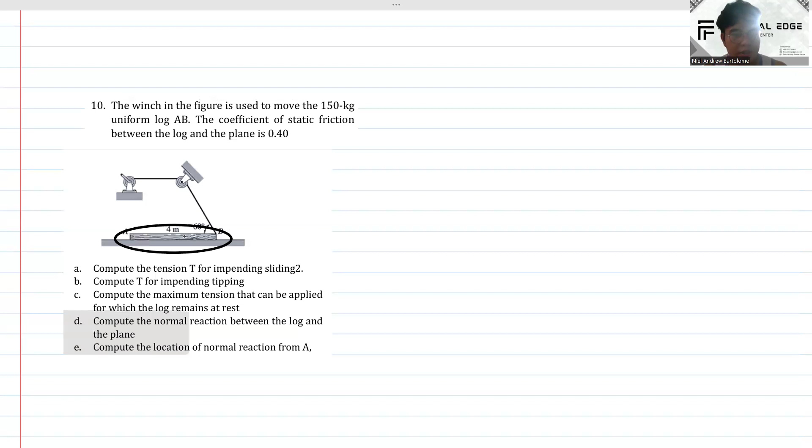So meron tayong wooden log AB, and the coefficient of static friction between the log and the plane is 0.4. Okay, so meron tayong log dito sa baba. So ito yung log natin, then sa baba, yung plane. So naka-rest siya. Then meron tayong winch dito that is used to move the 150 kilogram uniform log.

Okay, so ano yung mga nahanap? Part A, compute the tension T for impending sliding. B, compute T for impending tipping. And C, compute the maximum tension that can be applied for which the log remains at rest. Letter D, compute the normal reaction between the log and the plane, and E, compute the location of normal reaction from A.

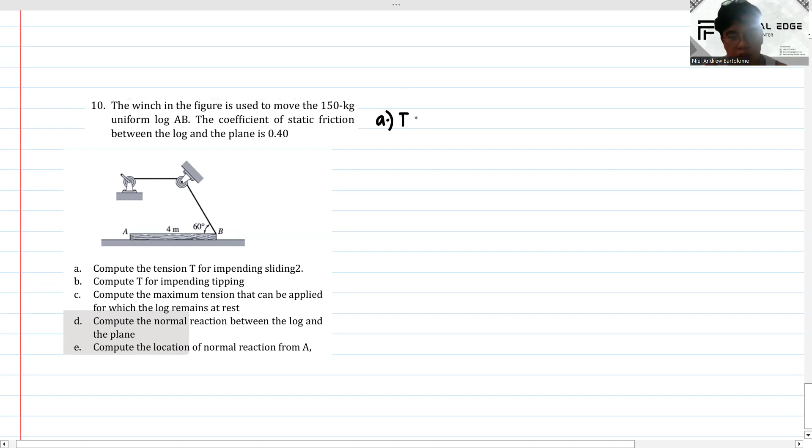So paano natin isosolve? Part A muna tayo, yung T due to sliding. Okay, paano natin yan isosolve? So kung i-check natin, drawing tayo ng ano dito, wooden log. So ito yung log. Yan, so due to sliding, so ito yung magiging direction niya.

So meron tayong tension dito, tawagin nating tension, T. Then ito yung point A, ito yung point B. Then ito yung magiging direction ng motion natin due to sliding. So ito yung magiging motion natin due to sliding. Right? So ano mangyayari dyan?

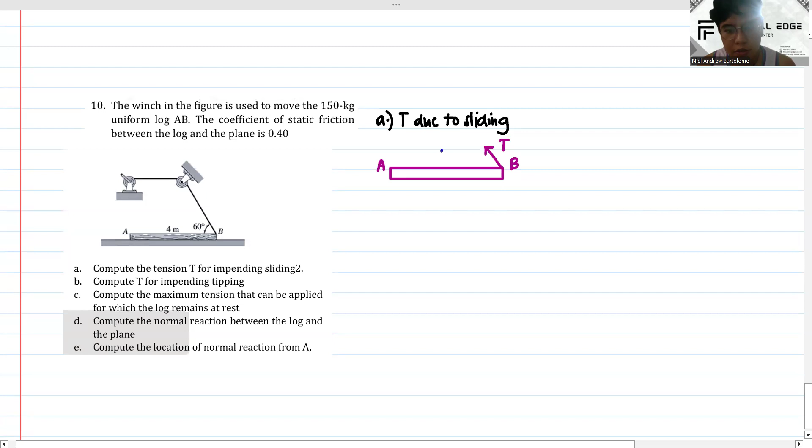So meron tayong self-weight, alisin natin ito. Lagay natin yung mga forces. So we have W that is equal to 150 times 9.81, so we have 1471.5. And ito, we have 60 degree. Okay, then ito, yan ba to? So we have 2 meters, then 2 meters din dito. Okay, ano pa ba?

So ano pa yung mga forces na pwede mag-act? So we have normal force N. Lagay natin dito somewhere here, unknown yung point ng normal force natin, yung application ng normal force, point of application, so di natin alam. Then we have, since pa-left yung direction ng sliding natin, so therefore yung mag-o-oppose yan is yung frictional force F, yung direction niya is opposite. So ito yung force F natin. Ayusin natin. Yan, so ito yung F natin.

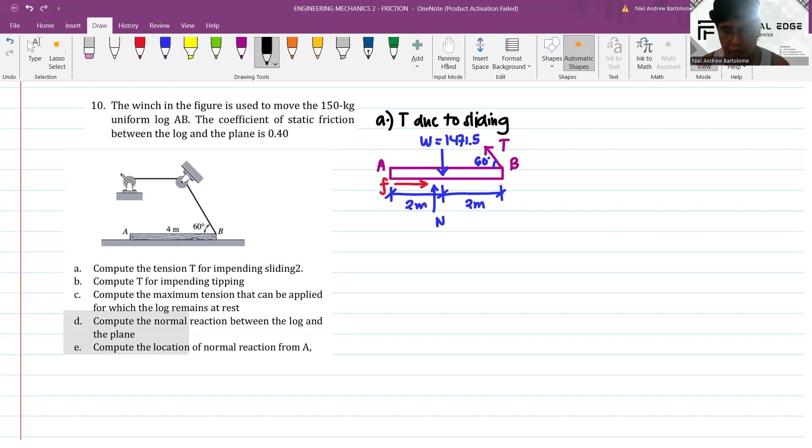So paano natin siya isosolve? So meron tayong T, unknown, which is yung hinanap, W, and F. Okay, so pwede natin masolve. Pwede ba? So paano natin siya masosolve? Una, summation of forces, X is equal to 0.

Okay, so we have yung ano natin, 0.4, no? So we have F that is equal to mu times N, that is equal to 0.4 times N. Then summation of forces, horizontal 0. So we have ito, positive to the right. So we have 0.4N minus T, yung component nitong T horizontal, T cosine 60 is equal to 0. Okay, so yan yung equation 1 natin.

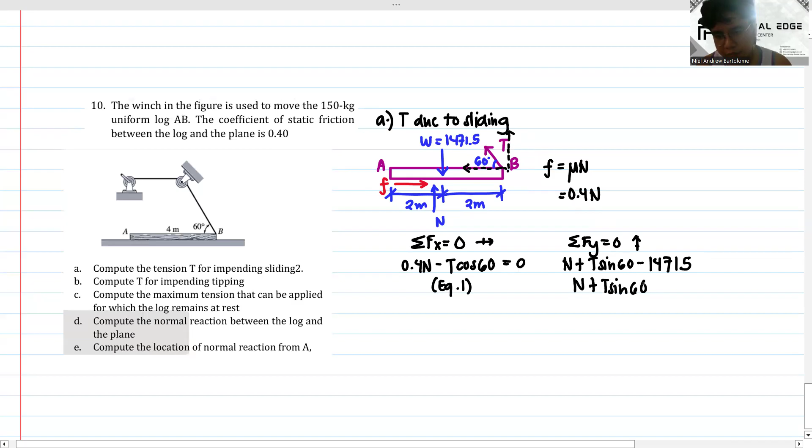The next, summation of forces, vertical is equal to 0, upward positive. So we have N plus T sine 60, yung T sine 60 po, ito yan, okay, yung vertical component nitong T minus yung weight natin. We have 1471.5. So we have N plus T sine 60 is equal to 1471.5. So ito yung equation 2 natin.

So we have two equations, two unknowns. Solve for N, then solve for T. Ilan ba yan? So mode 5, then 1, 0.4, negative cosine 60, then 0. So sa second row, we have 1, sine 60, then 1471.5. So yung N natin sa una, we have 869.26 newtons pa. Okay, then yung tension natin, we have 695.41. And itong T, yun yung answer natin sa part A. Okay, so nakuha na natin yung answer sa part A.

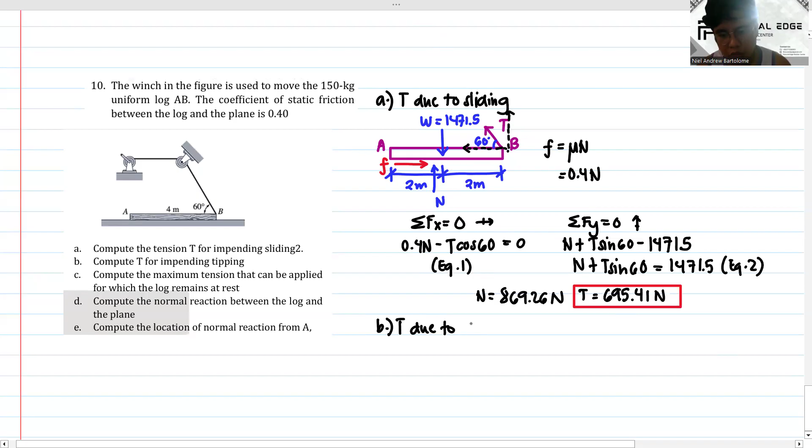Next, part B naman, so due to tipping naman. So anong mangyayari kapag due to tipping natin, T due to tipping. Okay, redraw natin yung figure. Baba natin. Yan, so ano mangyayari kapag tinip natin siya? So analyze natin, ito yung ano, so ito yung wooden log. Kasi natin.

Okay, sa mangyayari yan, kapag nag-tip siya, ano, so initial, ito yung magiging, tawag dito, yung positioning ng log natin. Pero kapag nag-tip siya, so magiging ganito na siya. Okay, so ito na yung magiging log natin. Then meron tayong tension dyan. Okay, then ito yung weight.

Weight natin, okay? So paano natin masosolve kapag due to tipping? Kapag tipping yan, guys, lagi tayong magmo-moment. Saan tayo magmo-moment? Kung titingnan natin, ito yung B, gumalaw to, umangat yan. So therefore magmo-moment tayo sa A. Meron tayong point A and point B.

Meron tayong mga force, yung mga forces. So we have W, tension, then ano pa? Ang mangyayari dyan, since magmo-moment tayo sa A, ang mangyayari kukomputin natin yung T. So ano pa yung mga unknown variables? We have N and F. Para mawala yung F saka N, yung normal force saka frictional force, itatapat natin yan sa point A.

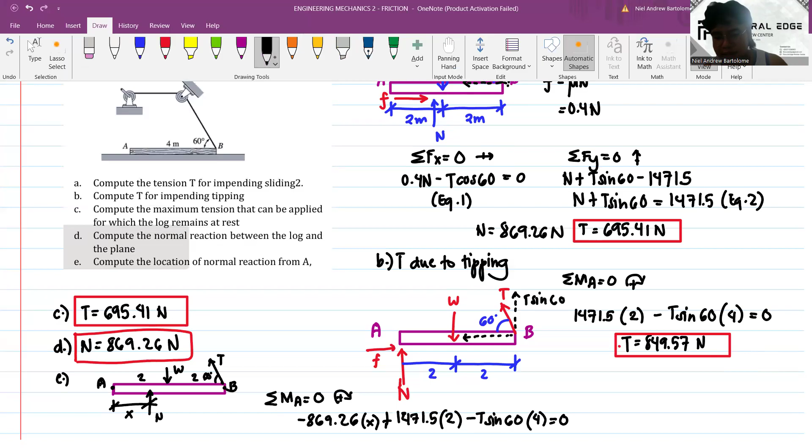Then solve for... solve na natin yung X. X is equal to ilan? So meron na tayong value ng T. So meron na tayong value ng T. Then solve for X na lang.

So we have 1471.5 times 2 minus 695.41 sine 60 times 4, divided by 869.26. So we have 0.614 meters, and yan yung answer natin for part E.

Okay, so ganyan lang naman ito na lang naman yung mga solutions natin sa problem 10. Okay, so next, last item tayo. Problem 11.

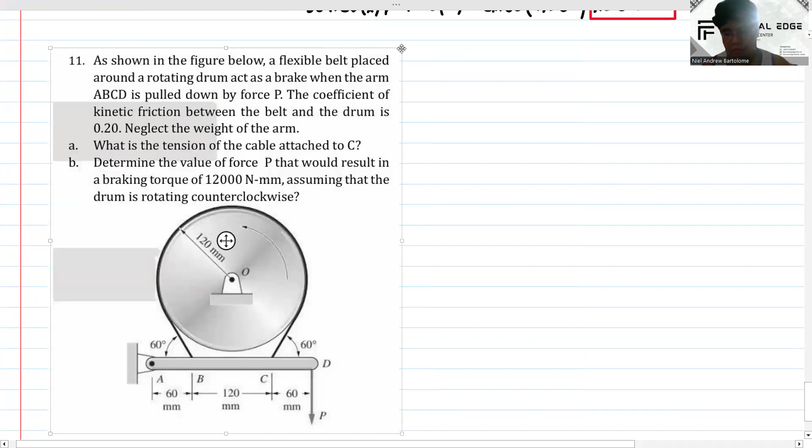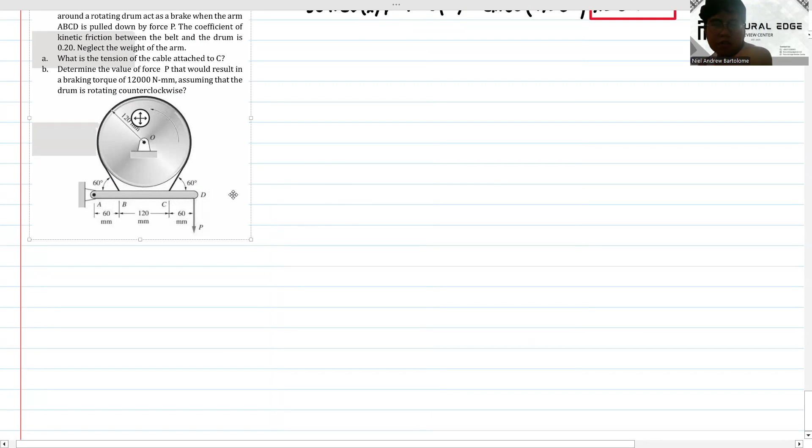Tingnan natin: as shown in the figure below, a flexible belt placed around a rotating drum acts as a brake. So meron tayong rotating drum dito, ano, then yung center niya is O, itong point O. Then act as a brake when the arm ABCD.

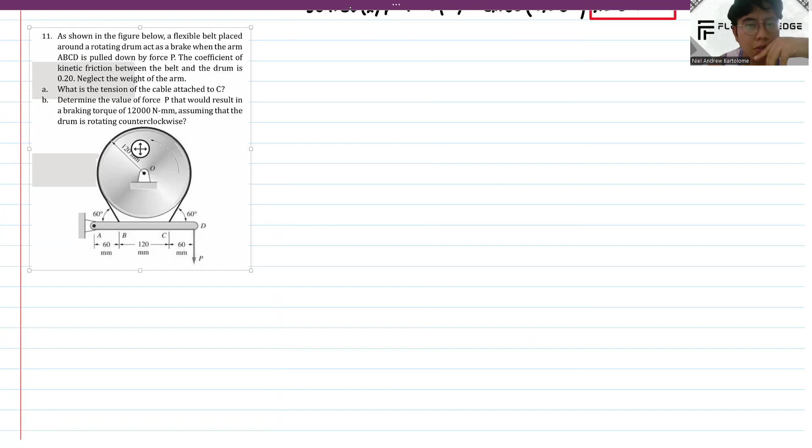So meron tayong arm dito sa baba, then meron dyan nakakabit na belt. Okay, and yung ABCD daw natin is pulled down by force P dito sa isang dulo. Then the coefficient of kinetic friction between the belt and the drum is 0.2. So meron na tayong given: yung mu k natin, that is equal to 0.2. Then neglect the weight of the arm.

Part A: what is the tension of the cable attached to C?

Okay, so ito, paano natin do-draw? So ito ano? So meron tayong tension dyan. Analyzing itong arm ABCD, ito yung tension at B, ito yung tension at C. Okay, yung hinanap is yung tension at C. Then analyzing yung drum, ito yung tension niya.

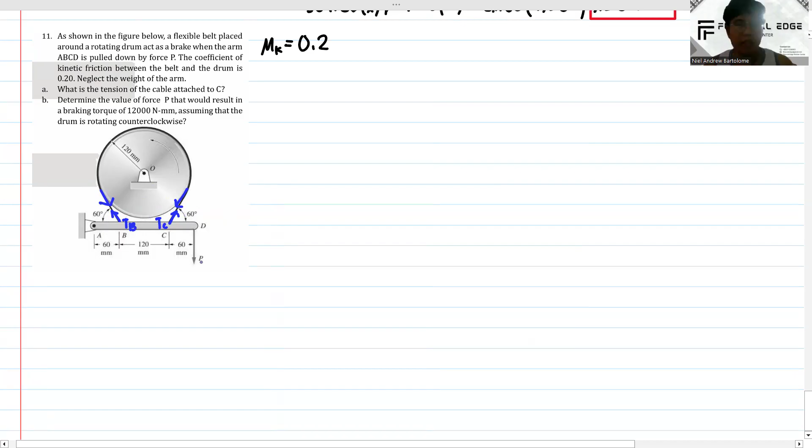Okay, paano natin siya isosolve? Una, analyze natin yung figure. Merong 60 degrees dito, then due to force P, ang tendency dito, bababa itong arm ABCD, so para magiging ganito siya. Okay, bababa yan, so parang ganyan yung magiging deformation or pag-deflect ng tawag dito nitong arm ABCD na to.

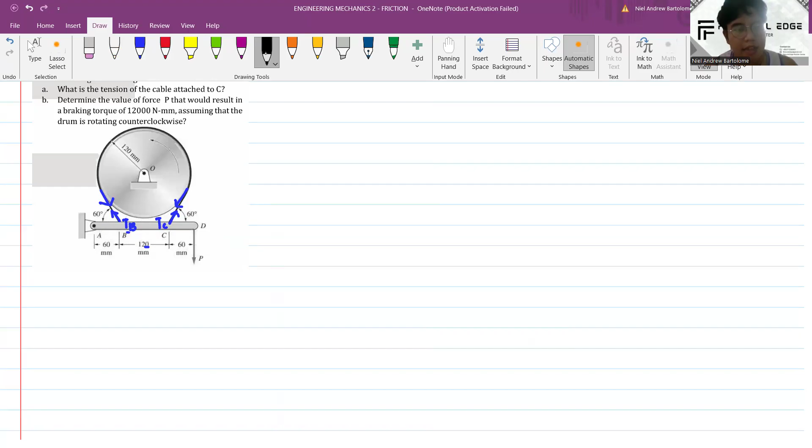Okay, then next ano gawin natin? Na-analyze natin, kung titingnan natin, due to force P, magro-rotate itong drum due to tension C. So mas mabigat yung TC natin sa TB. Okay, so makakakuha tayo ng assumption. So mangyari, we have TC that is greater than the tension at B.

Okay, so ano nga yung formula natin for the belt friction? We have T2 over T1, that is equal to e raised to mu theta in rad. Okay, so paano natin siya masasolve?

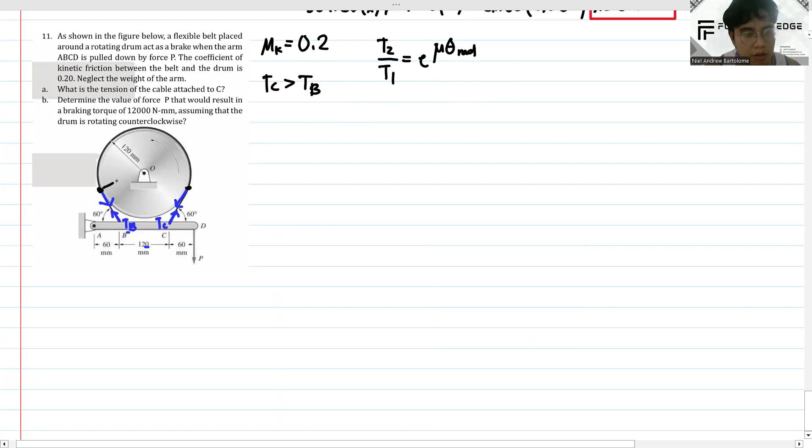So ang gawin natin, compute natin yung meron tayong T2, unknown yung value niya. Then yung T1, unknown din yung value. Then yung E, yung mu, meron tayo 0.2. Then yung theta, yan po yung subtended angle. Halimbawa nandito nagkaroon ng contact, ano, so ang hanapin natin is itong subtended angle niya, tawagin natin as theta.

Okay, so meron tayong theta dito. So ito, we have 60 degrees, magkabilang dulo. Then ito, 90, as you can observe, no, 90 ito. So ang gawin natin, gawa tayo ng triangle. Paano? So ito, extend natin yan sa baba. Okay, so kung ito 60, so ito 30, okay, 30, 90. Then ito 60 rin.

Okay, same lang din dito kasi symmetrical sila, right? Nakuha na natin. So yung alpha natin ay itong alpha, so itong angle natin dito, that is equal to 60 degrees. So pwede natin makuha yung theta. We have theta that is equal to, yung buong cycle niya, that is equal to 360 minus 2 times 60. So we have theta that is equal to 360 minus 120, so we have 240 degrees.

Okay, then anong gagawin natin? Pwede na natin makompute yung T2 and T1. Gawa tayo ng equation: yung T2, yan po yung magiging TC natin. Then yung T1, yung magiging TB. So that is equal to E times 0.2 times 240. Convert natin into rad, so pi over 180 degrees.

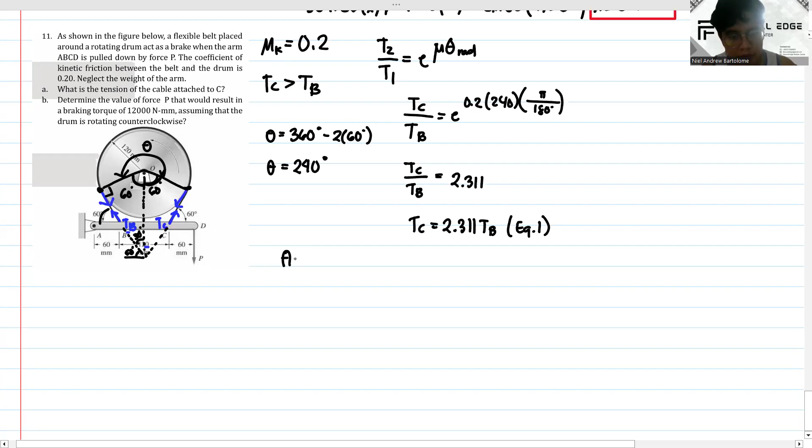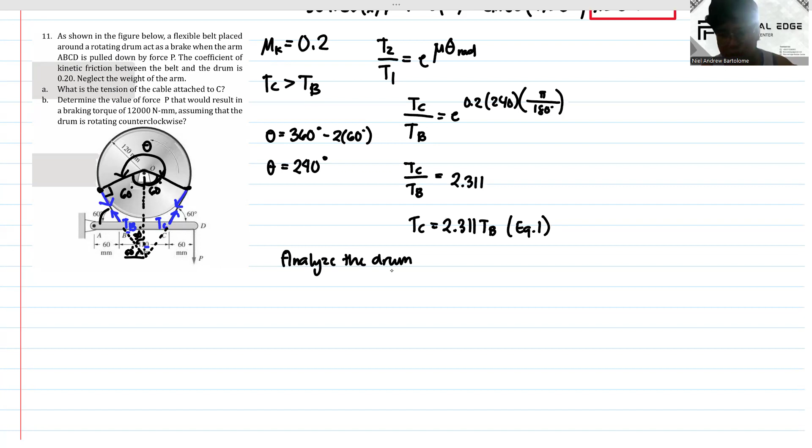Okay, next. Paano tayo makagawa ng second equation? Kung titingnan natin, analyze natin yung drum. Redraw ko yung piece ko tuloy. Figure, ayan.

Sub lang natin. Dalitan natin. Move natin dito, pwede na yan. Kung titingnan natin, analyze natin yung drum. So meron tayo dito tension at B, then meron tayong tension at C. Paano natin marerelate yung dalawa? Merong given dito sa part B na braking torque that is equal to 12,000 Newton millimeter.

Paano natin siya masosolve? Magmo-moment tayo sa O, that is equal to 0. Tawag dito, clockwise positive. So we have negative 12,000.

Okay wait lang, yung TC muna. Meron tayong mga radius dito, yan yung mag-act as moment arm natin. Unahin muna natin yung TC. So we have TC times its moment arm, that is equal to 120.

Then next yung TB natin, magkukha siya ng counterclockwise. Yung moment arm is 120. Then next we have yung 12,000, that is equal to 0.

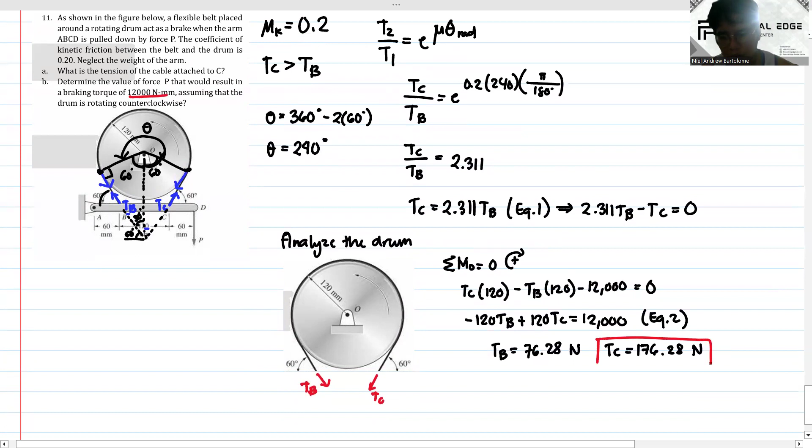Okay, so 120, 120, 12,000. Then we have, okay tama. Anong hinanap dito? Nakuha na natin yung answer sa part A. Okay ito, yan yung part A.

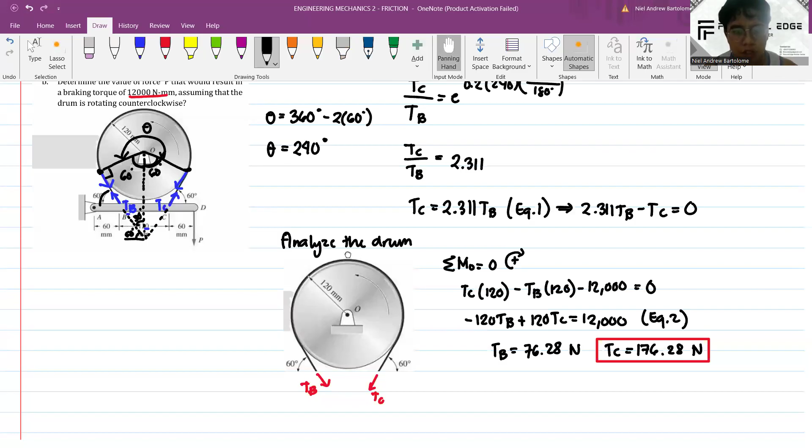Sa part A, ang next part B naman, yung value ng force P. Paano natin makuha yung value ng force P? I-analyze natin, ano yung i-analyze natin? Yung ABCD natin, okay, kunin ko lang yung arm part.

Yan, tapos usog lang natin. Okay pwede na yan, tapos analyze natin. So we have TB, we have TC rin. Walang self-weight yung arm. Ang gawin natin, resolve natin to component.

So we have TB sin 60, and ito rin, TC sin 60. Meron na tayong mga values niyan, which is ito. Then ito, TB cosine 60, then we have TC cosine 60, then we have P. Okay, is ito. Paano natin masosolve yung P?

Magmo-moment tayo about sa A, that is equal to 0. Gawin natin, moment tayo about sa A. Clockwise is positive. Unahin natin itong TB. So we have negative TB sine 60 times its moment arm, wait lang.

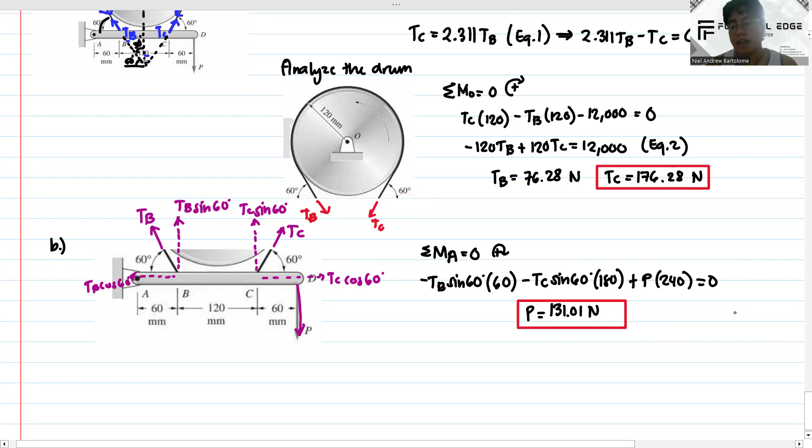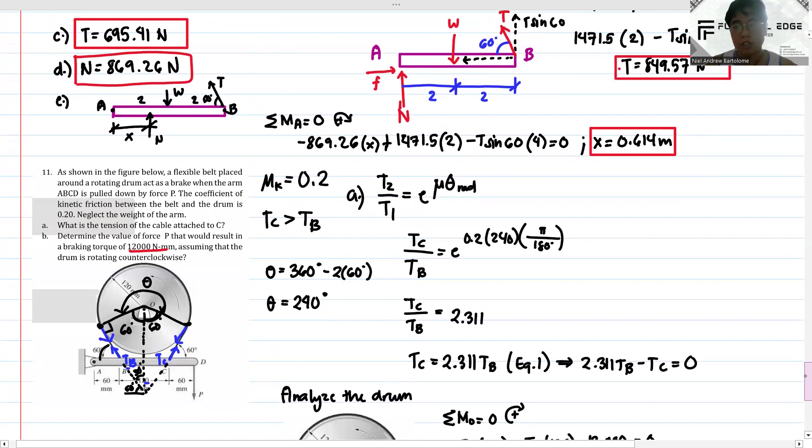Yan lang naman sa friction. Pagdating sa belt friction, medyo madali lang siya as long as alam mo yung formula natin, which is ito, yung T2 over T1, ito. At so far, wala pa naman lumalabas na belt friction sa board exam. Pero mas mainam na alam natin yung formula, para just in case lumabas siya sa board exam, alam natin paano natin isosolve yung mga ganitong klaseng problems. Ayan, next, centroid and moment of inertia naman tayo.